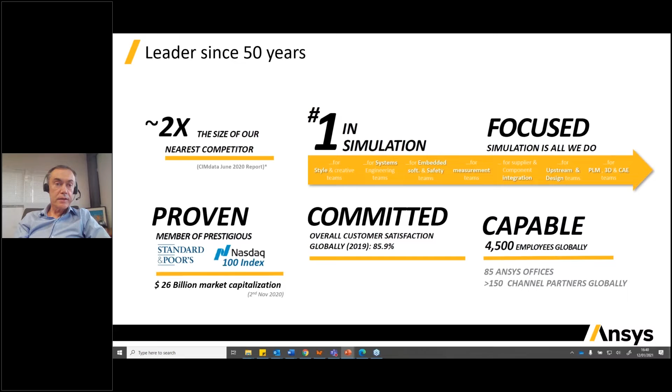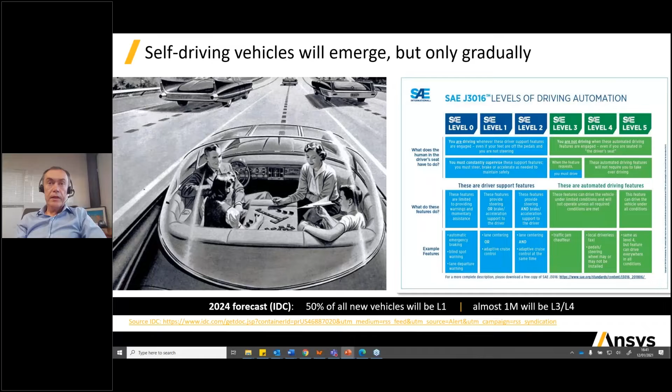And of course, L4, L5 will remain the goal of the automotive industry, and the key target for most of the key players, the chip makers, the component providers, as well as the OEMs. And the research and development activities will continue, and this will be to prepare the ground for a massive deployment at the end of the decade. So those are the two interesting aspects to keep in mind.

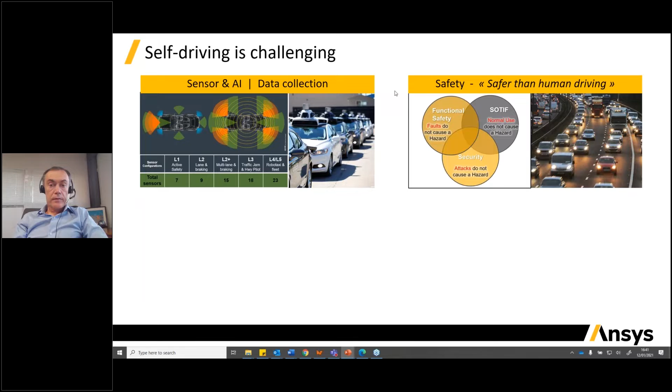When we consider the key challenges for self-driving, two are technology challenges. So of course, sensors, AI, data collection; collecting data on the road is really costly and a pain for our customers. Safety and performance is the target and the goal, and that's the reason for these massive testing requirements. And of course, the time to market pressure is also important.

And most of the big players are announcing highly automated functions soon. And the NCAP is the right place to see how the deployment will come, and the NCAP is also producing a good roadmap for this progressive deployment. And this NCAP is becoming more and more a business driver for the OEMs. And of course, digital transformation is a key aspect to consider.

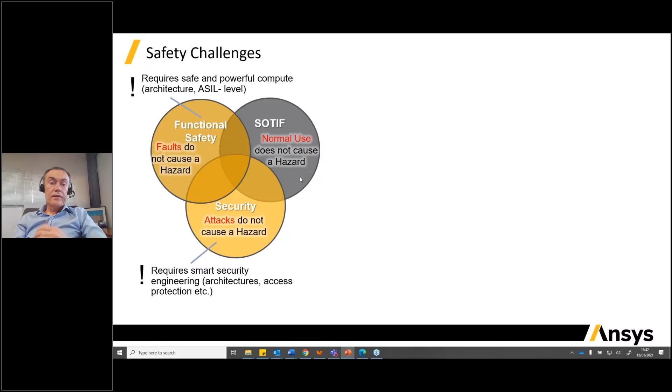So when we consider safety, safety is, as usual, linked to functional safety, the FuSa ISO 26262, but also cybersecurity, and mainly the SOTIF. And Didier showed a nice example of why the SOTIF is so important. It's so important because it requires the system to make maneuver decisions with accident risk less than a human driver. So it's like having a new driver license for the system.

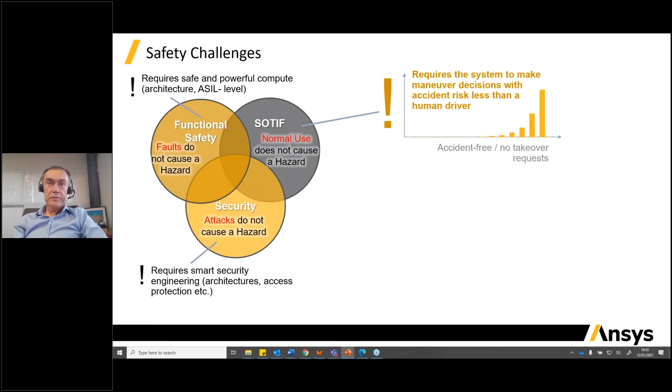But behind this, the SOTIF is giving a methodology and approach where the objective is to give this virtual driver license through normal use and through a definition of the operational design domain, the ODD. And this is triggering the need for scenarios, the scenario database, the need for an envelope of testing of the different scenarios.

And when we consider a system safer than human driving, we need to consider where the system will operate, in which conditions it will operate, in which region it will operate, and then we can define by a statistical approach the quantity of scenarios or kilometers that we need to test our system against.

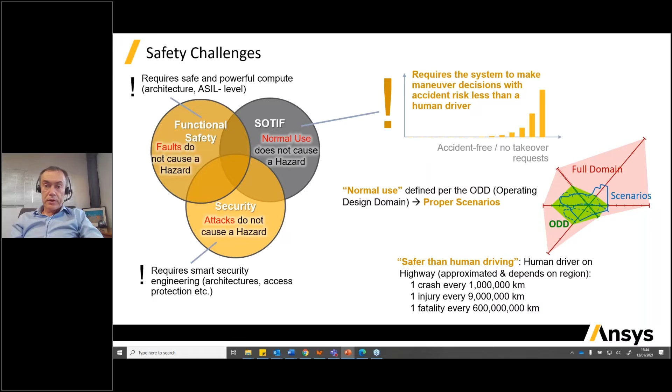And if we consider the perspective that Hervé gave us at the beginning, he was talking about 7 billion kilometers for testing. Of course, it's not possible on the road, and only a structured simulation, a structured methodology, and a system-based methodology approach is mandatory.

Most of the industry leaders have been defining some principles, for example in this white paper, Safety First for Automated Driving. This publication summarizes well the known safety by design and safety by verification or validation methods for all level 3 and higher automated driving functions. It requires maximizing the evidence of a positive risk balance of automated driving solutions compared to the average human driving performance.

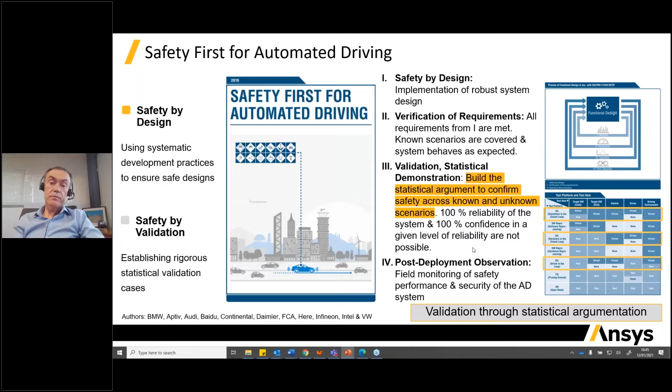So that means that, according to this methodology, we need to build a statistical demonstration of safety across the known and the unknown scenarios. And this is where we need to go toward a simulation approach in order to explore the known and the unknown scenarios, to cover this very large amount of testing scenarios. And this must be done each time a system is changed.

So in summary, we need to address safety by validation. We need to address more than 90% of the tests through validation and virtual simulation. And for two cases: first, sensor validation, which is performed mainly using data-driven and open loop simulation, also called reprocessing. That was also what Didier was showing.

But in the same approach, feature validation is conducted through a massive data-driven closed-loop simulation. And this is where we need to have a massive infrastructure for testing. And this simulation comprises several known and unknown methodologies and scenarios. So the key aspect is IT, a large IT infrastructure, and of course simulation accuracy, where we can adjust the level of accuracy according to the development stages.

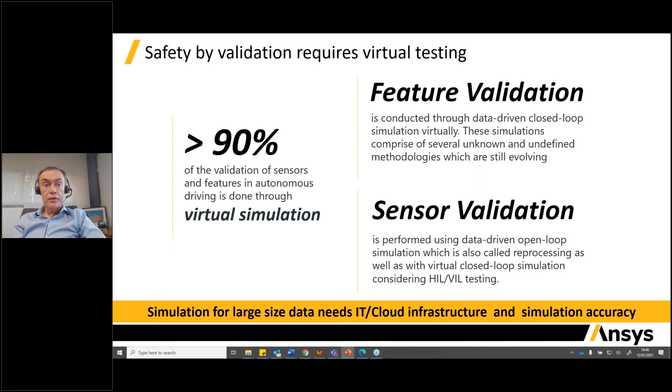And this is where ANSYS is coming, providing and supporting our customers with a multi-scale simulation approach in order to scale the level of fidelity according to the level of testing. So I would say at a very early stage and for feature validation, the objective is to test the features with a large amount of scenarios where we are mainly using models and not necessarily full physics models.

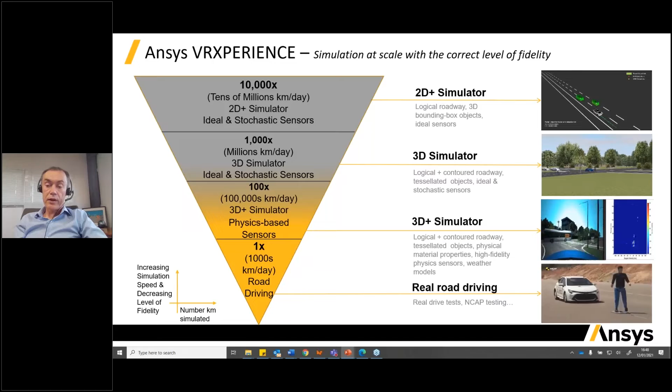And then we are going progressively, at different stages along the development, in order to bring a higher level of accuracy on the sensor models and on the vehicle models toward reaching a complete digital twin of the vehicle and the test. So that's the objective. And of course, at the end, the objective is to go back to the proving ground to do the final testing. And the key approach of such a platform is to provide a continuity of refinement of testing and a continuity of validation against the real driving and the real testing.

So when we consider the feature validation, what we call the data-driven closed-loop simulation, what we propose is to connect our simulation platform to a data ingestion platform where we can bring the collected data from the road into pre-formatted logical scenarios, combining them with the different parameters collected from the roads in order to produce a huge amount of concrete scenarios in the test plan. And through this automated workflow, we are applying different methods in order to strongly reduce the number of concrete scenarios. And this approach makes it possible to test on the HPC or on the cloud, and to have a very efficient workflow.

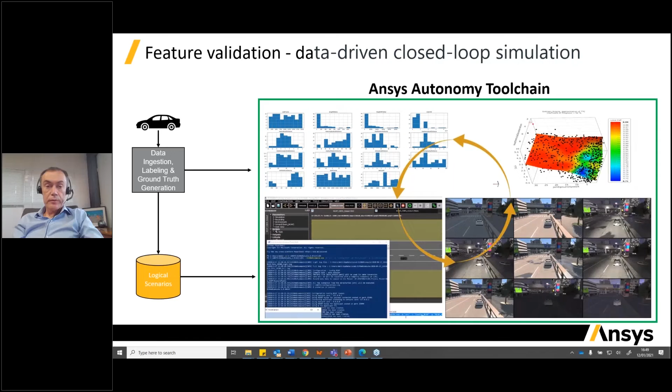This workflow has been implemented by Daimler, especially for an ADAS level 3 scenario-based validation approach. And this approach results in a solid workflow which considers the robustness evaluation and the reliability analysis of the different parameterized driving scenarios. In fact, what you see on this diagram is an implementation of the Pegasus workflow, which is the support of this safety validation approach.

And the way ANSYS is reducing the number of concrete scenarios is to provide the capability to reduce by a factor of 1,000 through a combination of different methods: smart sampling methods, sensitivity and reliability analysis, as well as a neural network approach. We are able to strongly reduce the number of concrete scenarios, which makes it possible to provide the proof of the validation with an optimized test plan.

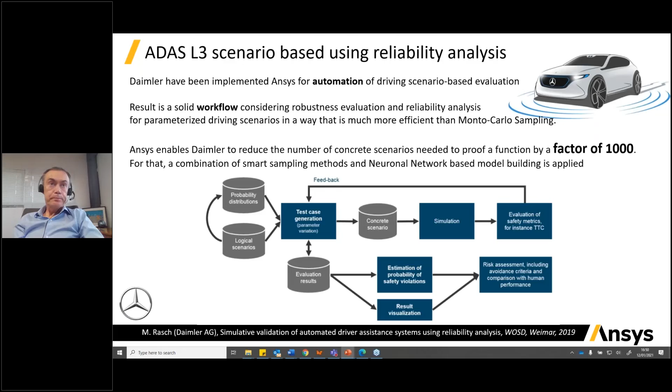And then we go to the sensor validation, and the sensor validation is a second aspect which is key for the validation. I mentioned already that it's really a pain for most people to go on the road and collect the data. Collecting the data is very time consuming. It puts most vehicle programs at risk because it comes very late in the process, and such an approach can bring a very huge amount of cost. Today we consider something like $10 to $15 per mile without the labeling.

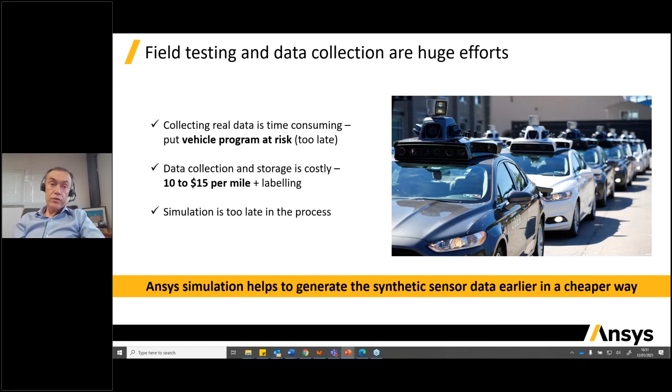This is the normal approach. So what we are doing today with our customers is to bring the simulation earlier in the process, and especially to bring the generation of synthetic sensor data earlier in the process and in a cheaper way. So for doing this, we bring our different sensor physics, and we are covering the 4 main sensors. And these 4 major sensors are aligned with the different use cases.

So, for example, at a component development level, which is more for the tier 1 and tier 2 suppliers, they can apply ANSYS for very detailed physics simulation, for example for a radar antenna, or for a camera or a LiDAR, for the optical aspect, the thermal aspect. All these aspects can be simulated in very detailed physics.

And then we reduce the physics in order to solve different new use cases in the vehicle integration approach, where the implementation of the sensors on the vehicle drastically influences the performance of the sensors. So by simulation, based on the CAD model of the car body, it is possible for a radar antenna to compute the installed performance of the antenna on the car fascia, for example, and the same for the different sensors. And then we bring these models into open-loop or closed-loop simulation for perception and fusion testing of sensors.

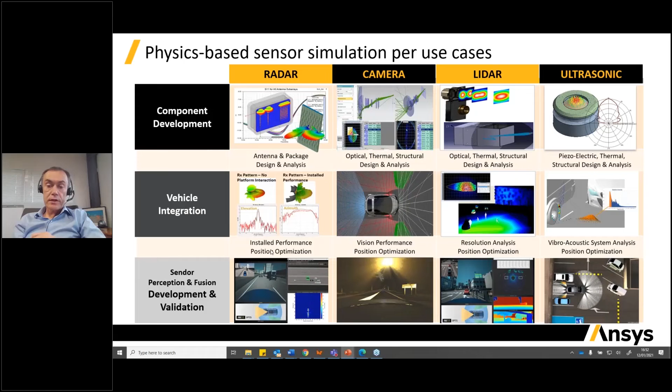And in that case, when we are talking about synthetic sensor generation for the different scenarios, we consider two approaches. One is the open loop, and for the open loop, we consider the sensor validation based on a data-driven open loop simulation approach, which is also called reprocessing. Such kind of simulation can also be used for machine learning as well.

And then we can go on the closed loop simulation, where it's mandatory at system level to test or to validate the sensor fusion, as well as to implement the worst case scenarios. And in that case, the physics sensors are interesting in order to have the full stack in the testing. So we can address the non-real-time software in the loop, as well as real-time software and hardware in the loop.

On the bottom, you can see an example with a radar, starting from the antenna on the air. Then we compute the antenna pattern as installed on the car body. So we can consider the different aspects of the implementation. And then we can go to open loop scenarios with the full physics.

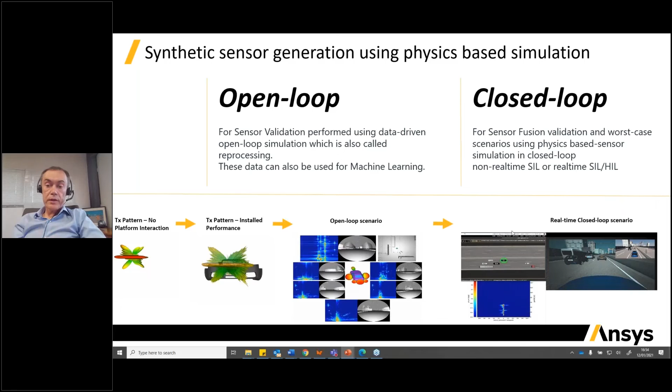And here you have a nice scenario with 6 radars, all computed on the driving scenarios. It's computed fast. And then we can go to real-time closed loop scenarios where it makes possible to achieve strong real-time with different scenarios. So that's the way we are covering that. And then when we are talking about hardware in the loop, the question is, why do we need physics for testing hardware in the loop?

The reason for physics is because you need to address different worst cases or rare cases or corner cases. And for a camera-based ADAS, nighttime driving is quite complex for several reasons. But the first reason is because what you see on the camera is light. So it's an illumination of an object, which can come from your headlamp or from different lights.

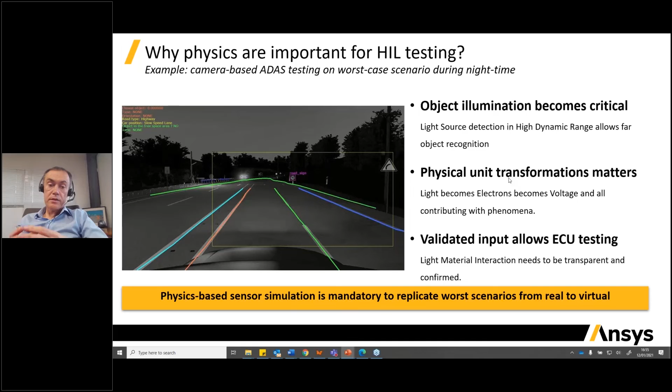And then this transformation of light into an image is done by an imager, which also reacts to the physics. So all these aspects can only be done considering the physics of simulation of the light. So that's an example for the camera. And then we need to bring these physics-based sensor models inside the hardware in the loop bench.

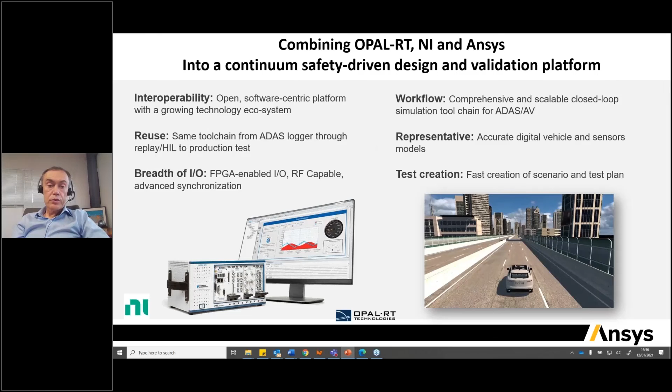And to do so, we are partnering with key players. So we are partnering with NI and OPAL-RT, of course, combining ANSYS physics simulation with NI, and we can let a system integrator like OPAL-RT have a complete system integration considering the ANSYS models inside the closed loop simulation environment. So this is the way we are approaching.

And here you have an example which has been built by OPAL-RT. So this is a test bench with an OPAL-RT platform where it makes possible to inject inside the ADAS ECU. So here in this box, you have the ADAS ECU where we can inject full physics images of the camera, and then we can put the ECU in exactly the same mode as it is running on the vehicle. So the ECU is not running in a HIL mode. The ECU is running in the vehicle mode, where it makes possible to test the corner cases.

So in that case, the video that I can show you is an example with the Mobileye EyeQ. So the Mobileye EyeQ is on the bench. The Ansys VRXPERIENCE is producing the image, stimulating the EyeQ. The EyeQ is then applying the perception and detection, and then stimulating the ADAS function. In that case, it is for testing the high beam assist function in a repetitive way. So it makes possible with such kind of bench to have a complete reproduction of different tests in a very systematic way.

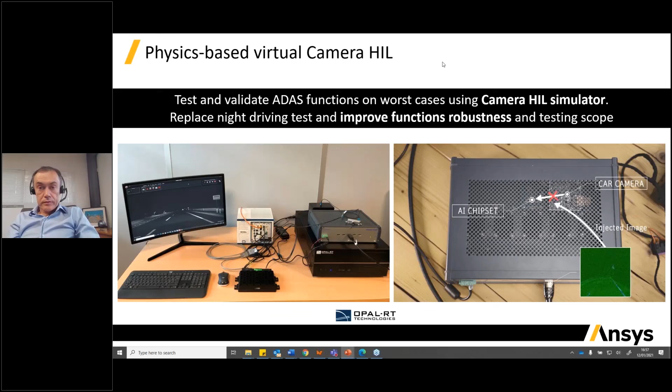So in a short summary, such kind of benches that we can propose with OPAL-RT bring complete robustness testing of a camera-based function on HIL, which makes it possible to replace 80% of the road driving testing by virtual validation. And this approach has been validated with different OEMs and suppliers. And we have the confirmation that we can produce synthetic field operation test data very early in the process. And then it makes possible to do the final robustness testing on the HIL camera-based platform. So all the camera-based functions can be tested on the HIL.

And then it also enhances, of course, the process between the OEM and the suppliers, making it possible to exchange models during the development process in order to create this digital twin along the development process, and not to discover the issue on the road when the car is released. So that's really a new innovative approach that we are proud and pleased to propose.